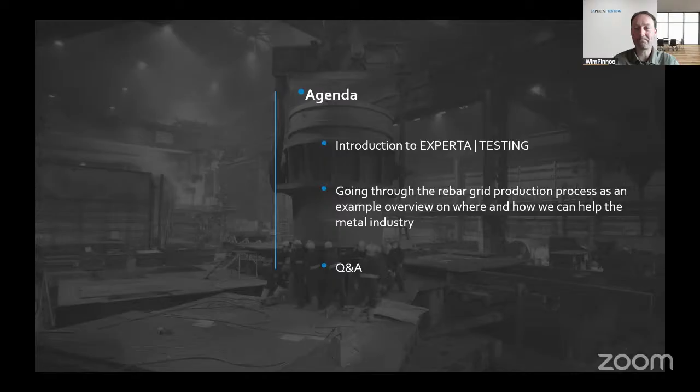So first of all, a little bit introduction what we can do. Basically, Experta testing, we can help really from the beginning, from the mining of the supplies to really a certified product being on the market.

What we also do, we help the full production process from the steel to the finished products, where we also help with looking at all kinds of simplified testing methods, how we will explain how we work with that.

I also will have a short introduction about compliance and everything that has to do all around that. And I will have also a short introduction in how we can support you in the complete chain.

From R&D, having new technologies or new products bringing to the market, but also to set up a qualification system where we can help with finding partners to bring your qualification system up front and make it to a certified product.

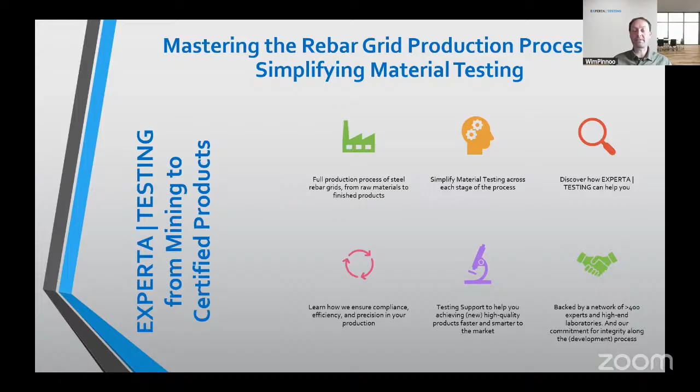And of course, we are backed with a whole network of laboratories and experts to help us with all specific expertise. I'm not the expert in anything, but I'm a little bit the spider in the web to help you search the right expert for the right expertise you need at that point.

So basically, if we look at the rebar production process, that's a very simple product, I would say, but it's a product where there are a few layers. First of all, it starts with the mining and the raw materials. Then, of course, you need to make the steel.

Then you need to cast this steel. Then you roll it into making bars from it. Then you make the fabrication of the grids. And then, of course, you have to deliver this product and make it compliant to the standards there are for.

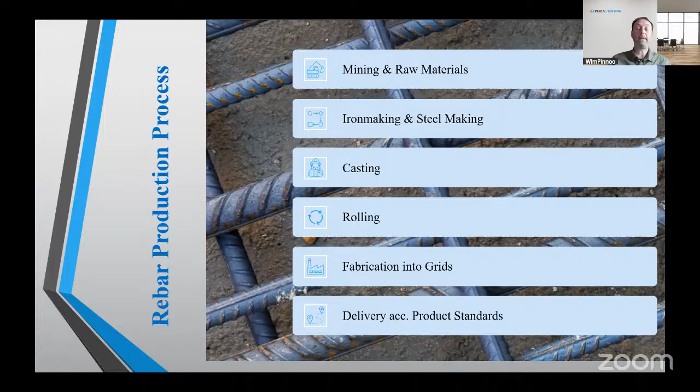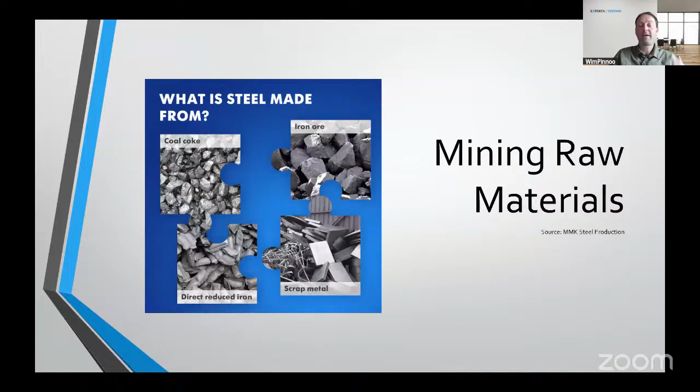So if we look at the mining process, basically, to make steel, you have four products. You have the coal coke, you have the iron ore, you have the direct reduced iron, which is also a little bit a side product, and then you have the scrap metal, of course.

You're all people from the steel industry, so you probably know this process better than I do. But basically, if you have the ore, it's mostly hematite or magnetite. You make a coking coal from it. You add limestone to it, and you add scrap metal to it, and you bring that in a whole process.

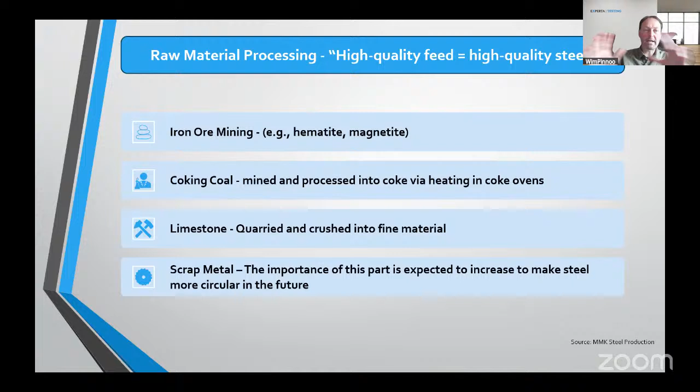Which has a small overview of this. In this, of course, you have two possibilities. One is the integrated steel making, and the other is a little bit more innovative, I would say, electrical steel making process.

But basically, you bring in those materials, you sinter them, bring them in ovens, you bring them in a furnace, and you come up with steel. Of course, you have to add some process parameters, and it's more complex than that, but I like to simplify things a little bit.

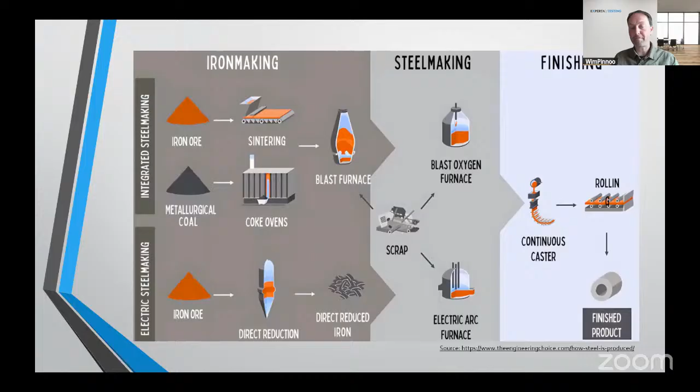And once you have the steel, you make it finishing by casting it, rolling it, and bringing it to steel products. And that's what we call half fabricates. So then you end up with certain steel grades and steel qualities.

For our example, the steel rebar. In Europe, we use the B500B grade for steel bar, for rebar grids. In the US, maybe this is a different grade you use, but basically it has to do with the carbon, it has to do with the micro-alloying of it, and mostly there is a small element, vanadium, that needs to be added as an additional to give it additional strength.

The limits, there are some limits we can put in for sulfur, for phosphor, and of course this has to do with the ductility, with weldability of this steel. And what we are looking for is to have a good carbon equivalent that has to be controlled for having a good weldability.

So if we make a grid from those bars, that it is strong and it needs to reinforce the concrete, of course, and the structure. That's basically the goal of the whole rebar grid.

So the traceability of each steel has also been recorded, and therefore needs to be like a QA QC management system to put in place everything on that, so that you can bring that on the market.

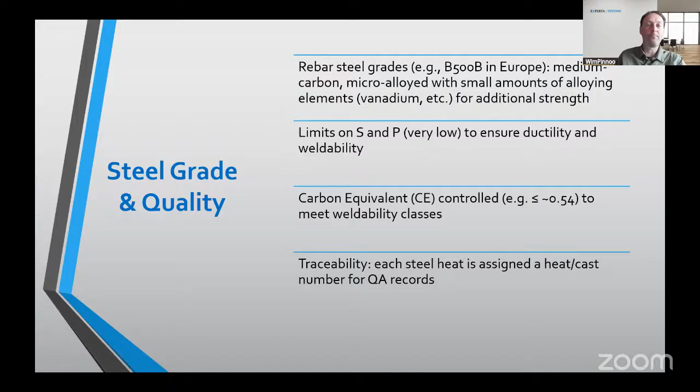That's very short, well, how rebar production works. It's basically an introduction, and of course, that's not my specialty. But where we can help is this whole package of testing.

First of all, we can help with material testing, with mechanical testing, by hardness testing, tensile testing, compression testing. We can help with thermal testing. The most thermal analyses are in scope of us.

We can work with spectrometry, spectroscopy, where we can look at identifications of those steel grades, to look at trace elements that are in it, the plumbium, the vanadium, the chromium.

Are they in the good amount, and are they in the good structure? We can look with microscopy if there is a good microstructure in it. Is it in the ferrite phase, the pearlite phase, or the martensite phase of your steel? Or we can look at which elements are there for having a good steel classification.

Do you mind breaking in? There's been a question come in here about, and it kind of relates to this, do you offer corrosion durability testing? Excuse me, I did not hear which test you were asking for.

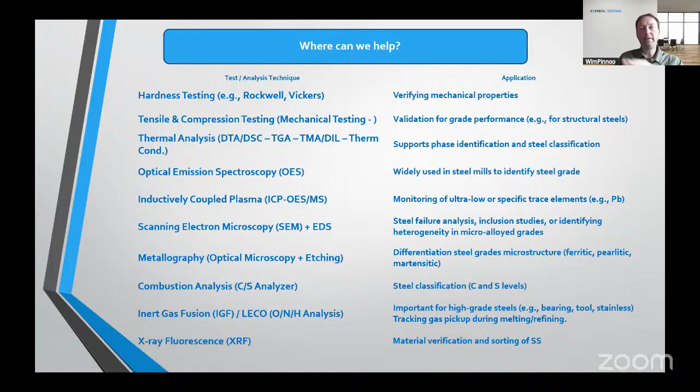Next to that, after we have produced them, we need to roll the bars in some spaces, and this will give some geometry and specific product related properties, like surface properties, diameters, weights, geometries, in general.

There we can't do that much, but of course we can help them find laboratories who can help, only with the metallurgic properties. There we can help in a very advanced way with SEM microscopy and so on, to look at structures.

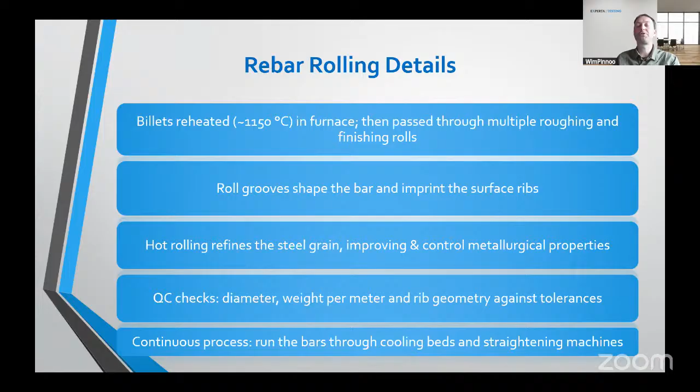Next to that, of course, the quality control system comes in, and there we can help set up everything from the mechanical setup, the yield strength, the tensile strength, the elongation that is needed. It all has to be in accordance with certain norms, and there we can help a lot with setting up this whole system.

We do a lot of yield testing on this B500B, small mistake in my presentation here, and visual inspection, also NDT inspection, where we look with NDT testing methods if there is micro cracking, grindings, or porosity effects caused during production, where we can see micro porosity, which is mostly an effect of the casting with some problems. There we can see, before it comes to the market, if there are some problems with your product.

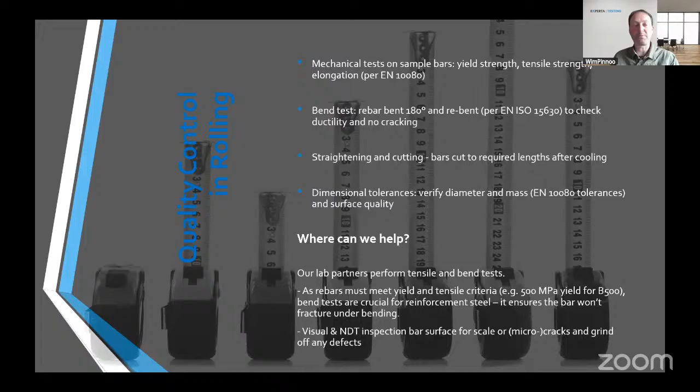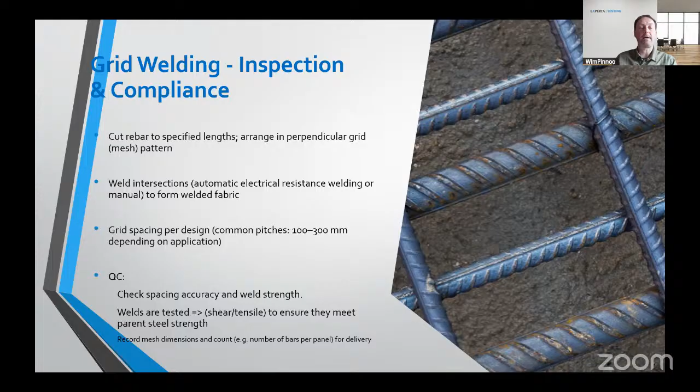Of course, next to the casting and production, we also look at this grid. Is the grid really welded in the good way? That's also important. It's not only about making a strong bar, but if they are not welded completely, they don't have any functionality at all. So we can look with NDT testing at the welding, but we can also look with advanced methods like TGA to see if there are eutectic layers formed during this welding process. This is also something where we can be of help.

Here you see a small overview of what we can do in quality control. If it is epoxy coated meshes, we can also look at coating effects and corrosion. This relates also to your earlier question. Also advanced corrosion testing with very harsh environments, think of environments where there is H2S, salt, or any type of harsh environment you'd expect in marine or offshore applications. For instance, if you want to make a concrete block that has to be put in the sea for a wind turbine, this has to be very well controlled for durability against corrosion in very harsh environments, as one example.

Of course, we can help you with everything that has to do with CE marking and compliance testing. There are a lot of performance and industry specific norms that have to be followed to bring your product to market. Also for our reinforced rebar grid, you should be compliant with certain standards, normations and CE markings.

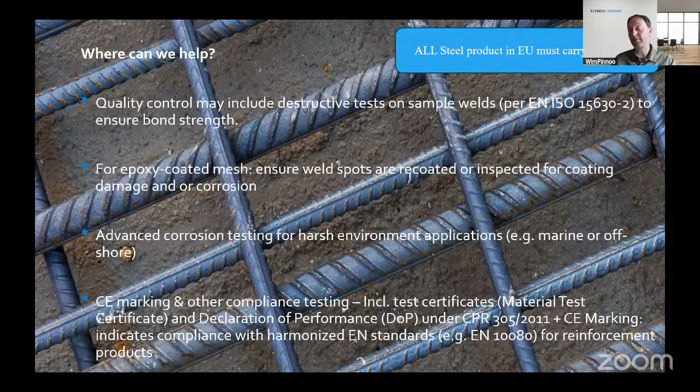So these are some standards, quality control management systems that sometimes are involved with these rebar grids. The general requirements of welding, the testing methods for welding and reinforcements, has to do more with mechanical properties. The Euro code is applicable in Europe, but of course it will have a counterpart in the US as well. And the general construction product regulation from the EU gives you the CE labeling so you can bring your steel on the European market.

With all those kinds of requirements, there are many tests involved, and we can help you find the exact specialist laboratory for this specific test or application. That's our strong point, and where we add value, because we know laboratories who are very specialized in those kinds of regulations, so we can help you bring your product faster and more safely to the European market.

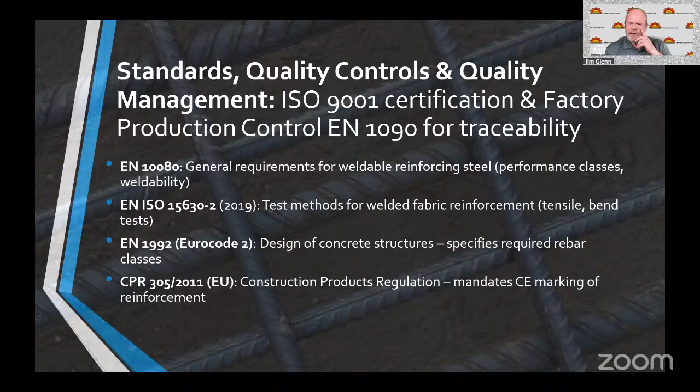So that brings another question that just popped in here. Does Experta testing have any other ISO or type certificates, maybe like 17025, or do you follow some other industry specific certifications for testing?

Well, Experta testing is not certified itself, because we are a consultancy company. That's not needed. But in our group of 400 laboratories, we have many accredited laboratories who are certified, of course, to 17025. If you give a test request, we will always ask you if it needs to be performed against an accredited lab or not. And if you ask for that, we will only select accredited labs for performing the test. So that's how we work.

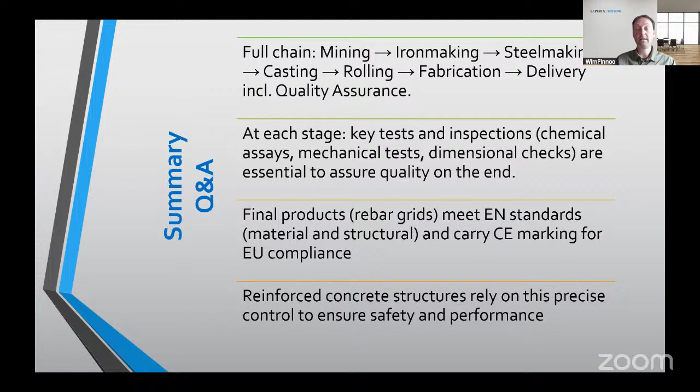So that's basically what we do at Experta, and I think now it's time for our Q&A. So if there are questions, I'm open to help you.

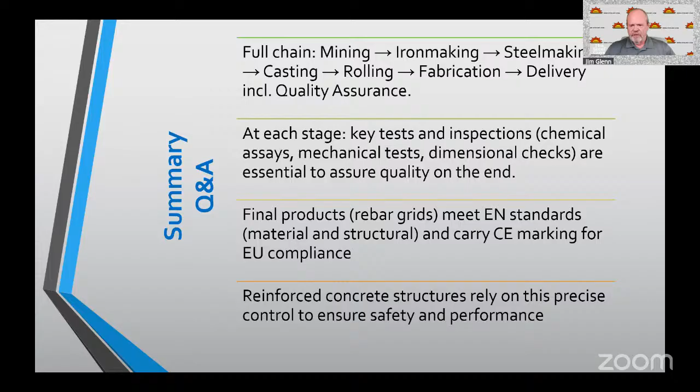Yes, there was a question here that said: does the advanced testing include any deep learning, AI technology, or AI image recognition coming into play to revolutionize the understanding, easy and fast reporting, and inline quality monitoring that was not possible before?

We work at the moment on AI modeling with some projects. Basically, we support those models with real industry property values. We work a little bit on that side, but we also have partners who do NDT work, where they already work with advanced software that makes AI fault detecting possible on the images they make.

In the steel industry, we have helped a petrochemical company with detecting eutectic layers in welding for drilling purposes. We've also looked at very thin layer coatings, and we've also looked at heat exchangers for the process industry.